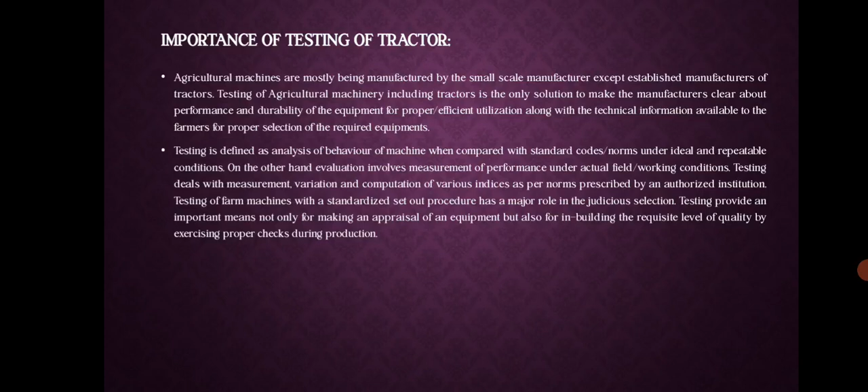Importance of testing: testing of a machine means systematic determination of functional performance, structural strength, durability, power requirement, and capacity by running the test under a wide range of conditions in the laboratory and field.

Testing is usually for all the stakeholders like manufacturers, consumers or farmers, exporters, and export inspection agencies as well.

Now let's see a few points on how testing of tractor is important. Testing is important for export inspection authorities for elimination of the need for exhaustive inspection of consignment exported from the country, saving expenditure, time and labor.

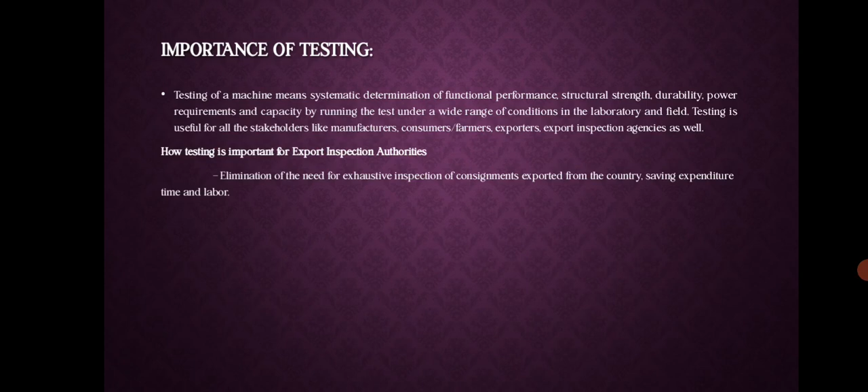Next, how testing is important for manufacturers: streamlining of production process and introduction of quality control system, independent audit of quality control system by BIS, reaping of production economies accruing from standardization, better image of product in the market both internal and overseas, winning of wholesalers, retailers and

stockists, consumer confidence and goodwill. Financial incentives offered by the Industrial Development Bank of India and Nationalized Bank help know where his machine stands in comparison with similar types of machines in the market, so he can improve his product. It also enables him to add more information to the technical literature related to the machine.

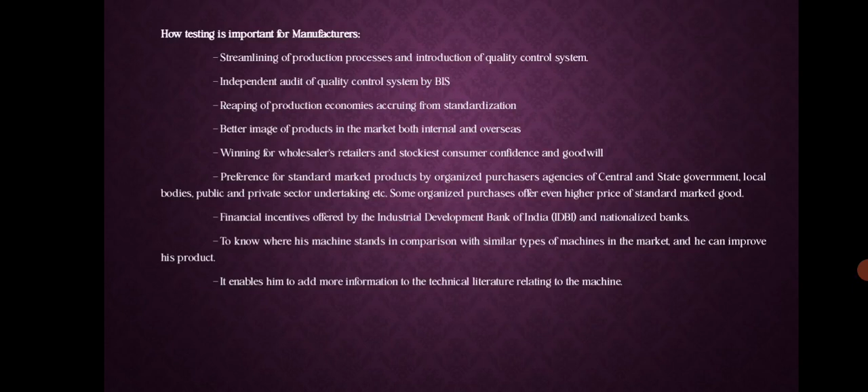Next, how testing is important for consumers: it helps in choosing a standard product, free replacement of standard marked product in case of their being found to be of substandard quality, protection from exploitation and deception, assurance of safety against hazard to life and property. The knowledge of the comparative performance of similar types of machinery will help the user choose an appropriate machine to his requirement at the lowest cost.

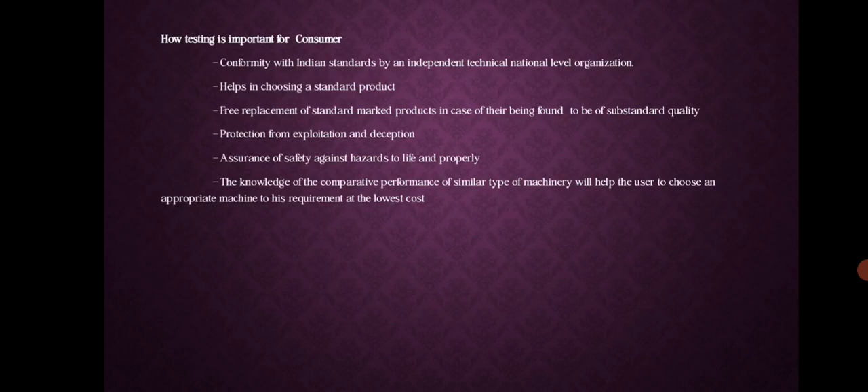Next, how testing is important for organized purchasers: it provides a convenient basis for concluding contracts, elimination of the need for inspection and testing of goods purchased, saving time, labor and money, and free replacement of product with standard mark found to be substandard.

Next we can see how testing is important for exporters: exemption from pre-shipment inspection wherever admissible, and a convenient basis for concluding export contracts.

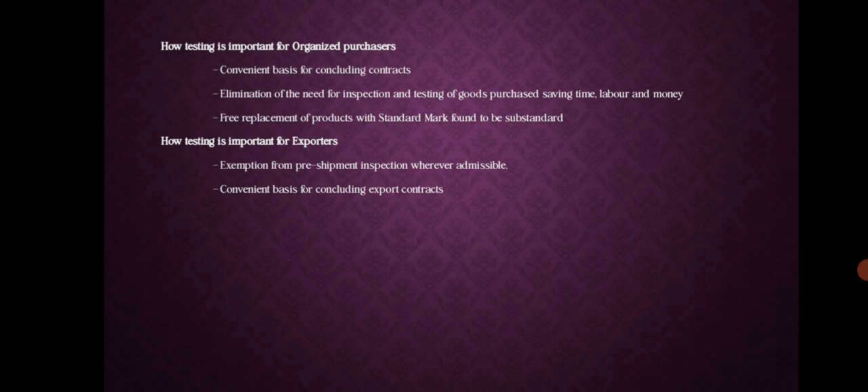Next we can see about major testing and evaluation centers in India for agriculture implements. There are several institutions in India, like Central Farm Machinery Training and Testing Institute in Madhya Pradesh, North Region Farm Machinery Training and Testing Institute in Haryana, Southern Region Farm Machinery Training and Testing Institute in Andhra Pradesh, Eastern Region Farm Machinery Training and Testing Institute in Assam.

Next we will see about the procedure for testing. There are several steps for the testing.

First, BIS has published standards on machines used in the country. Mostly, testing of a particular machine is undertaken as per relevant clauses of the code. In case the standard has not been published for the machine, a code and procedure is developed by the testing center and used for testing purposes. This testing procedure helps in formulation of test codes by BIS.

The complete testing of the machine involves checking of specification, development of test facilities and instrumentation, conducting the actual test, analysis of data, presentation of data and report writing, and product certification mark scheme.

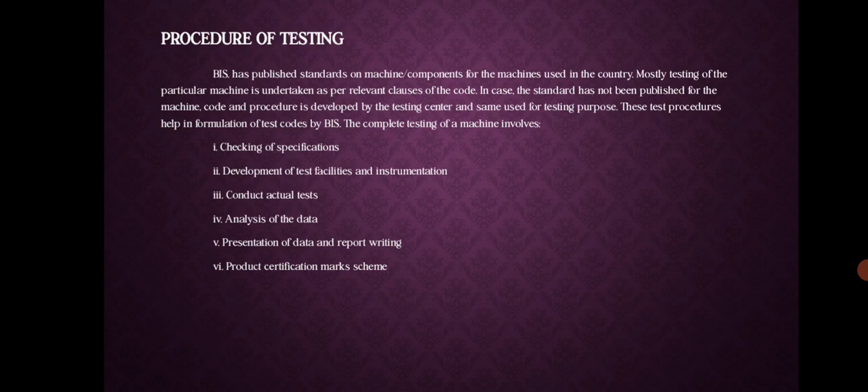Let's see one by one. First, checking of specifications: generally the test code includes a few important specifications of the machine that are mandatory to meet specific requirements. A few specifications have to be specified by the manufacturers, and the testing center has to verify such dimensions within the tolerance limit.

Second is development of facilities and instrumentation. The test code gives a guideline for developing a test setup, required for carrying out a specific test on the machine, equipment or component. The testing center has to develop a setup which should meet the requirements specified in the test procedure of the test center. As far as possible, high quality instrumentation should be included in the test setups.

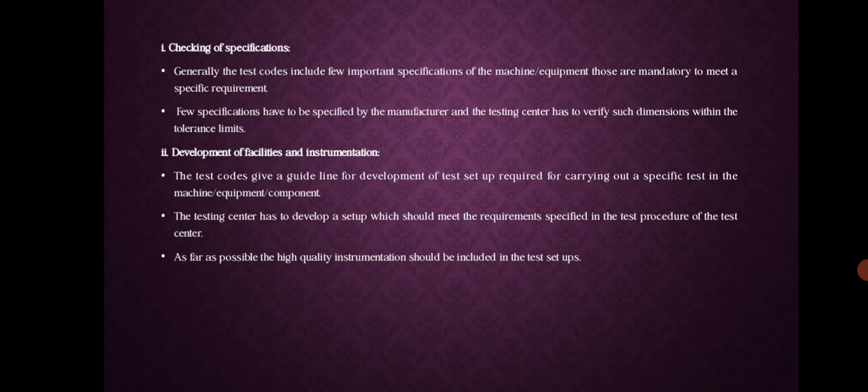Next is conduct actual test. The actual test should be carried out on the machine as per the test procedure specified, and the data recorded in the given blank tables.

Analysis of data: the data obtained during testing is analyzed for presentation in the record format. Use of a computer should be encouraged.

Presentation of data and the report writing: the report should include the sections of the clauses, those that comply with the standard and those that do not conform to the standards.

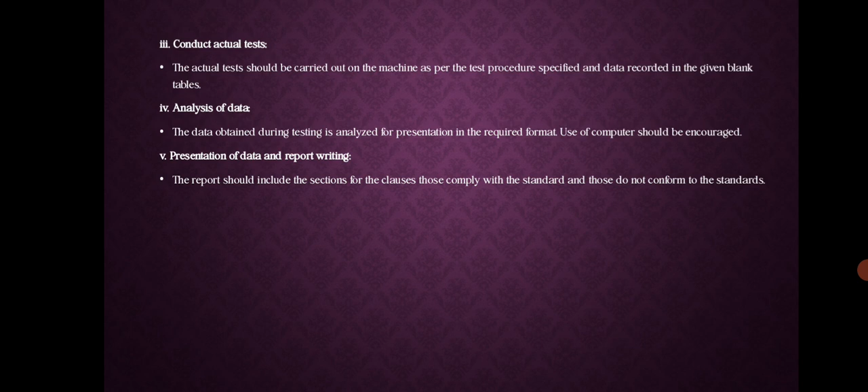Next is a product certification marks scheme. The Bureau operates a certification marks scheme under the Bureau of Indian Standards Act 1986 and the rules and regulations framed thereunder.

The Bureau's standard mark ISI on an article certifies that the article complies with the requirements specified in the relevant Indian standard, and also guarantees that the manufacturer has operated a quality control system in production which is monitored through regular inspection and checks, giving assurance that the article will comply with the requirement of the relevant Indian standard.

The certification marks scheme also provides an inbuilt mechanism for ensuring the quality of the product right from the raw material stage to the finished product. The BIS certification marks scheme is operated on a voluntary basis.

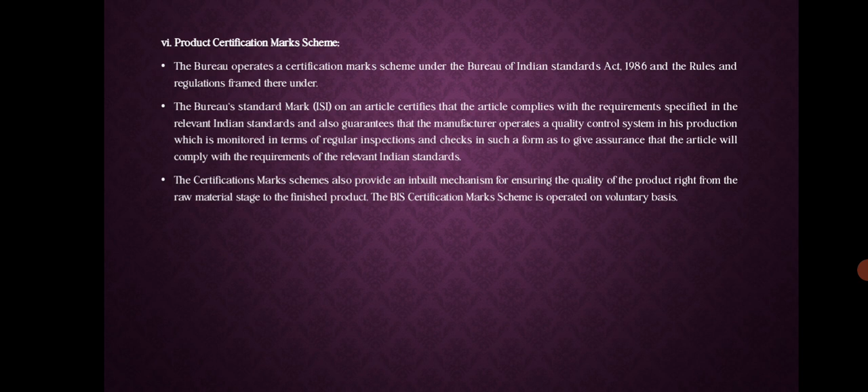Tractor test eligible for OECD approval. Compulsory test approval shall require checking as follows: main PTO and 5 extra points for calculating fuel consumption characteristics, hydraulic power and lifting force, drawbar power and fuel consumption. A tractor without a main power takeoff, or with one that cannot transmit the full engine power, can be tested at the engine flywheel or by drawbar test.

The testing station, as arranged with the manufacturer, shall make the choice between the two methods. The tractor without a lifting system or without hydraulics service coupling remains eligible under the code.

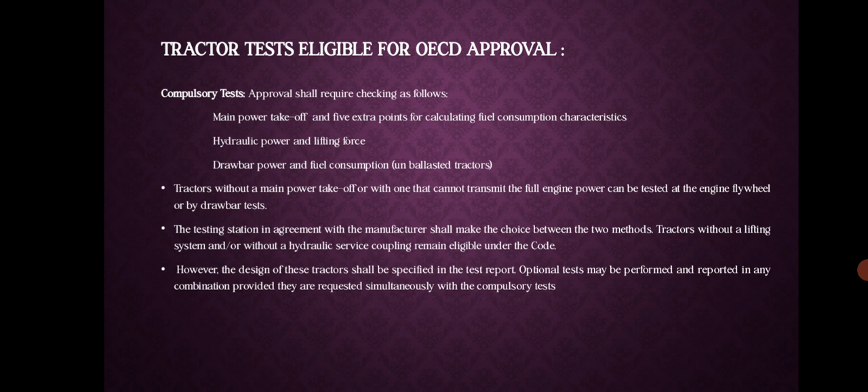However, the design of these tractors shall be specified in the test report. Optional testing may be performed and reported in any combination, provided they are requested simultaneously with the compulsory test.

Optional test approval shall require checking as follows: engine test, additional power takeoff ratio, fuel consumption during power takeoff and drawbar power testing, hydraulic power optional test, performance at the belt or belt pulley shaft, performance in a hot atmosphere, and low temperature starting test.

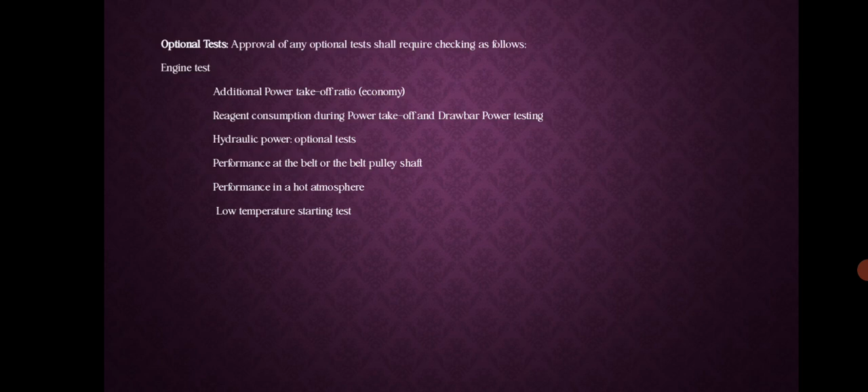Additional drawbar test, 10-hour test, axle power determination, turning area and turning circle, center of gravity, braking, external noise level, waterproofing test.

Repeat of any of the compulsory or optional tests at different settings. Approval shall require checking as follows: eligibility for the same category, compliance with test conditions under the code, clear specification of difference from the original test, and compliance with specimen test report results.

Bureau of Indian Standard for Tractors, Tractor Test. The brief outline of various types of tests provided by the Central Farm Machinery Training and Testing Institute are as under. Tractor testing is carried out in accordance with the Indian Standard Institution as amended from time to time.

The tractor is subjected to the following test and evaluation. Laboratory test includes checking of specifications, PTO performance test, belt pulley test, drawbar performance test, power lift and hydraulic performance test, brake test, air cleaner oil pull-over test, noise measurement, mechanical vibration measurement, location of center of gravity, turning ability, and visibility.

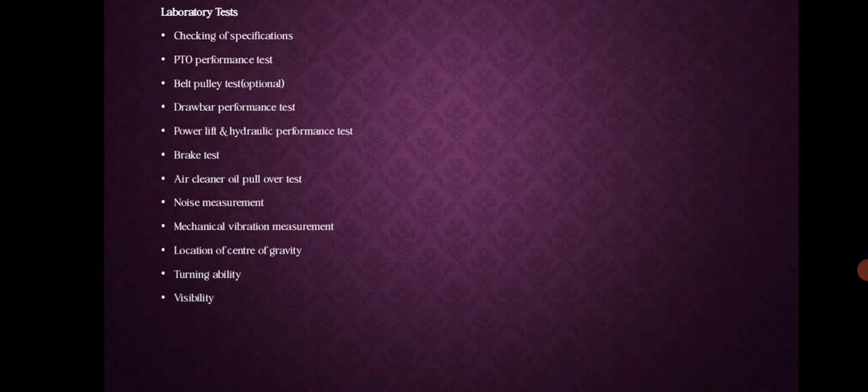Field test: for initial commercial test (ICT) for 35 hours and for batch test of 35 hours, field test with the following implements: plow or rotavator, 20 hours for ICT and 20 hours for batch test, puddling test of 10 hours duration under actual field conditions, followed by waterproof test of 5 hours, applicable for both ICT and batch test.

Haulage test. This is done with a 2/4 wheel trailer and the gross load recommended by the manufacturer. Components and assembly inspection is done to assess the wear, breakdown, etc.

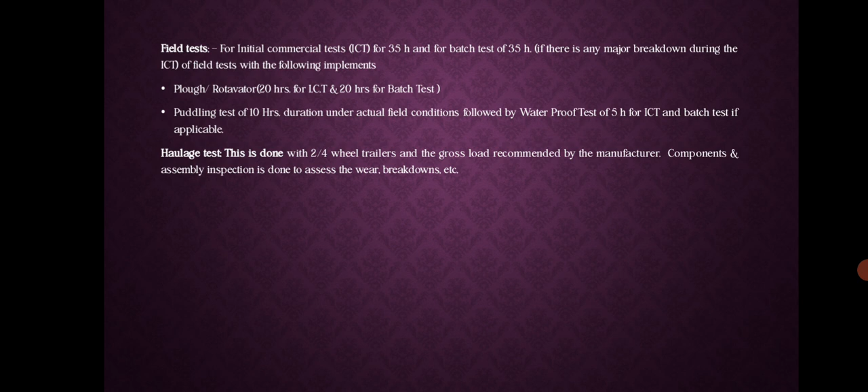Next we will see about the power tiller test. Performance evaluation of power tiller is conducted in accordance with the Indian Standard IS as amended from time to time. The power tiller is put into the following test and evaluation: laboratory test such as specification checking, engine performance test, rotary shaft performance test, drawbar performance test.

Parking brake test, noise measurement, air cleaner oil pull-over test, mechanical vibration measurement, turning ability test, chemical composition test, and wear characteristic test of rotavator blades.

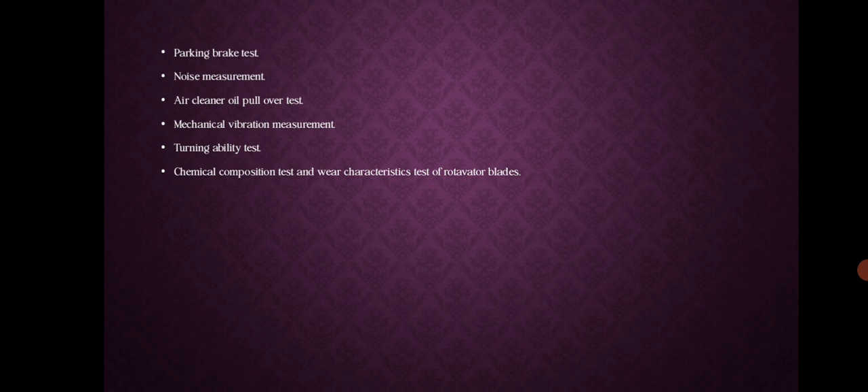Field test includes initial commercial test and batch test of 35 hours of field test with the following implements: MB plow, dry land rotavator, puddling under actual field conditions. Hauling test, components and assembly inspection is done to assess the wear, breakdown, etc.

Quality test. The organizational structure, responsibilities, procedures, processes and resources used to implement quality policies and objectives are collectively referred to as the quality system.

To cope with the growing challenges of competitiveness, ISO 9000 series of standards has been formulated by ISO to provide for quality management systems. India has adopted the ISO 9000 series of standards as IS/ISO 9000 series of standards. This standard provides not only guidance and criteria for formal control of products and services by the company, but also gives assurance to purchasers of the set of stated requirements.

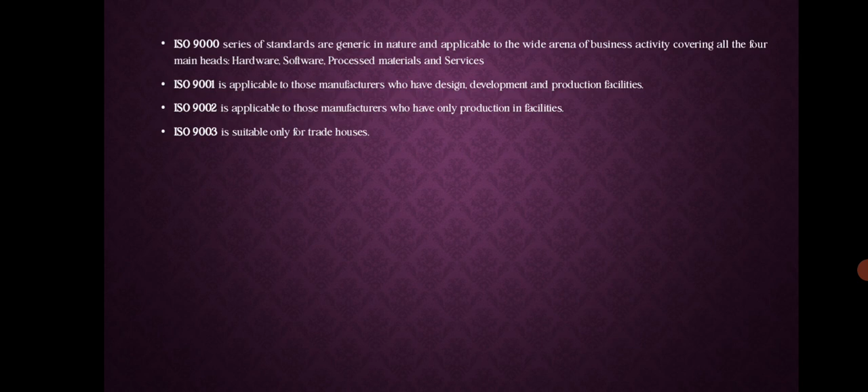Quality should not be defined in comparative terms as poor, fair, good or excellent. Quality is an absolute entity, viewed from the point of customers. Quality is the goal of every business. So the objective definitions of quality are: fitness for use, fitness for purpose, conformance to requirement, conformance to specification, customer satisfaction, product satisfaction, product designed and made to work properly, and worth for money.

So these are the testings of tractor and power tiller. Thank you.